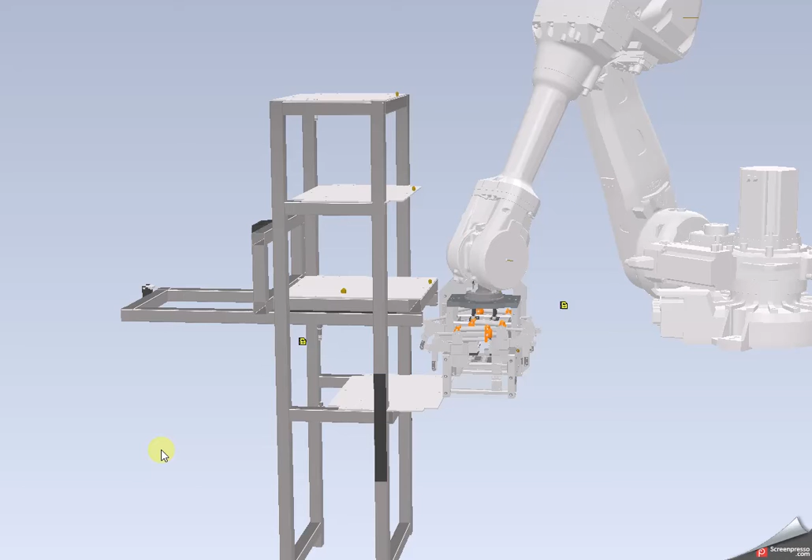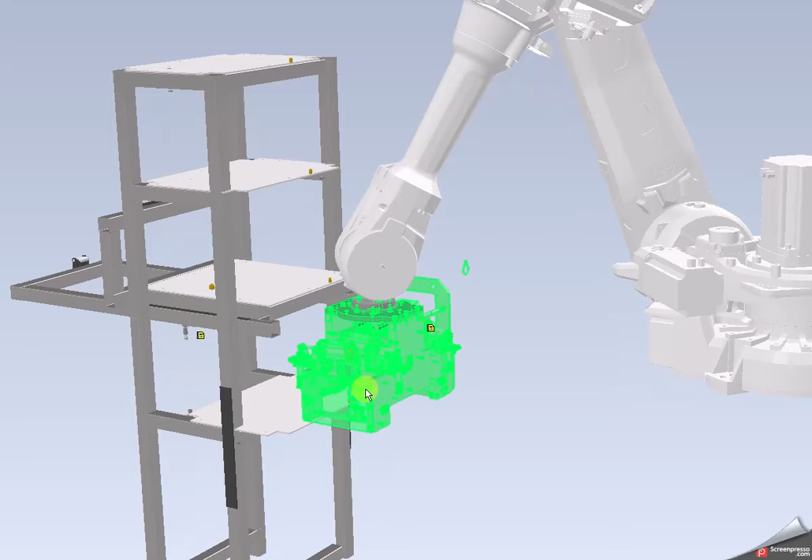Okay, so I want to demonstrate today how to link an Excel spreadsheet with a model, so that rather than doing the typical drag and move things around to try to look at things, I can actually give this a definite picking position. This is a robot, we've got a gripper on here, just for picking up a part. Can't show you the part because it's from the automotive industry. And this is a rack here, which...

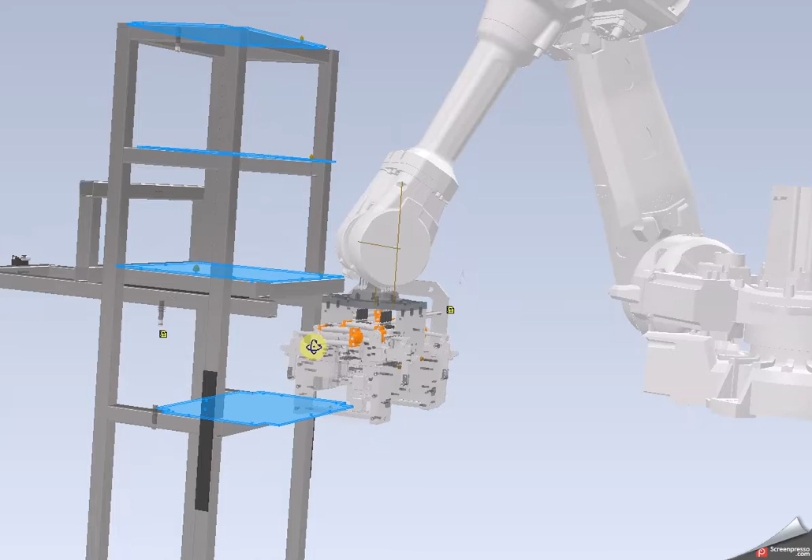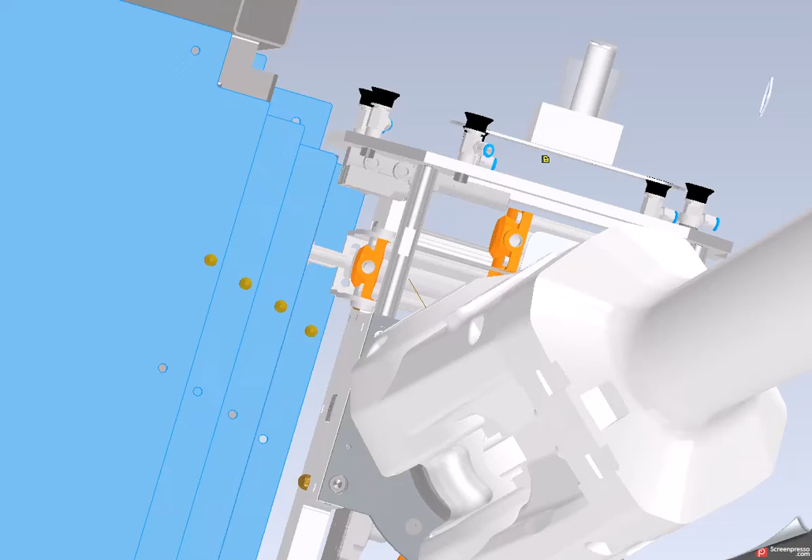This rack has 4 shelves which hold parts that are on dowels. A dowel pin, our part sits on there, but because our robot is getting close, you can see I've actually needed to stagger these shelves. The knuckle of our robot is going to collide with the part above, so we thought we'd step these back about 50mm. And to check we don't get collisions anywhere...

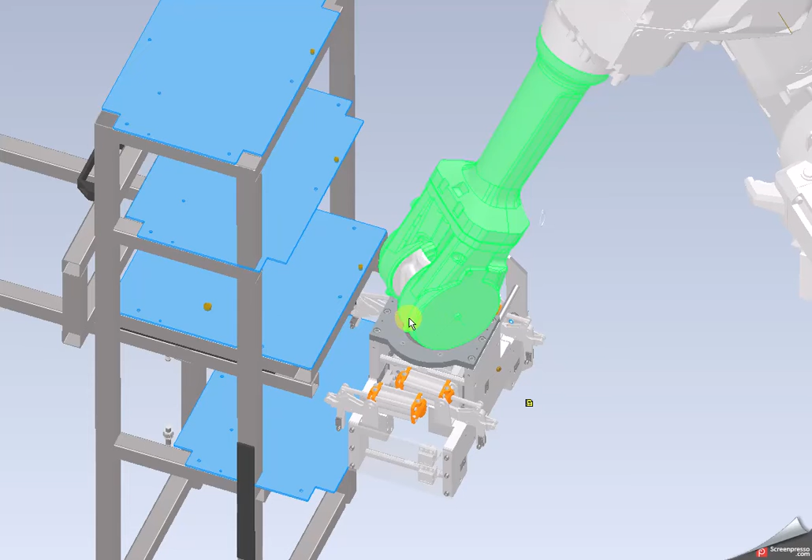I actually want to move the robot from position to position, nice and easy. I don't want to have to drag it each time. So I'll show you what we've done here in our robot assembly, under our...

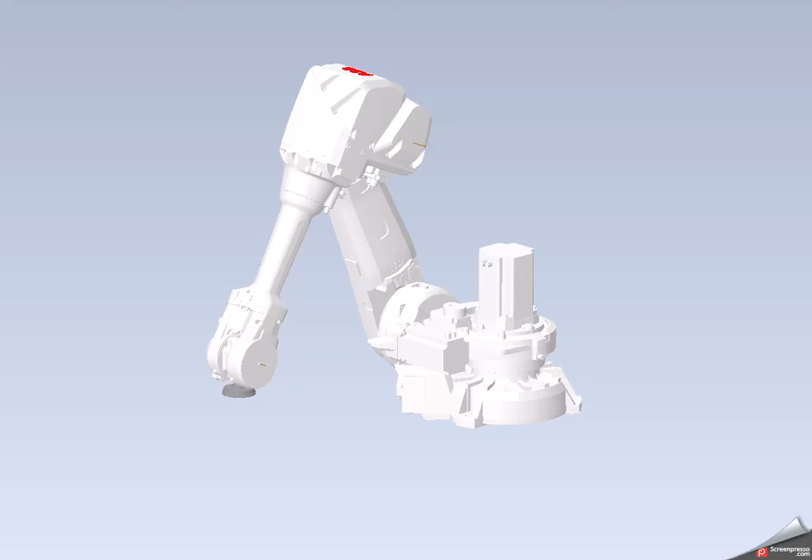I've given the height of our gripper to the floor. Here's our floor, we'll show you that. Okay, we've got the height of our gripper, and then in our main assembly, under our robot... oh no, I think I didn't put it in our robot. Everything's controlled inside here.

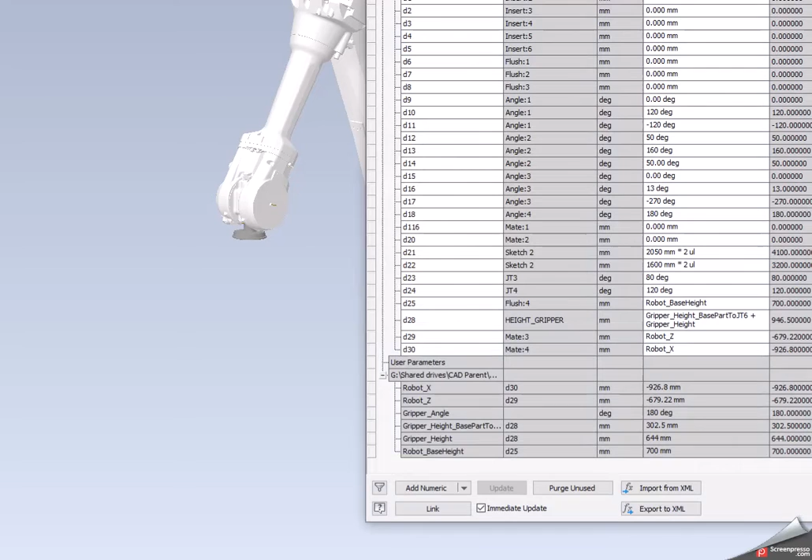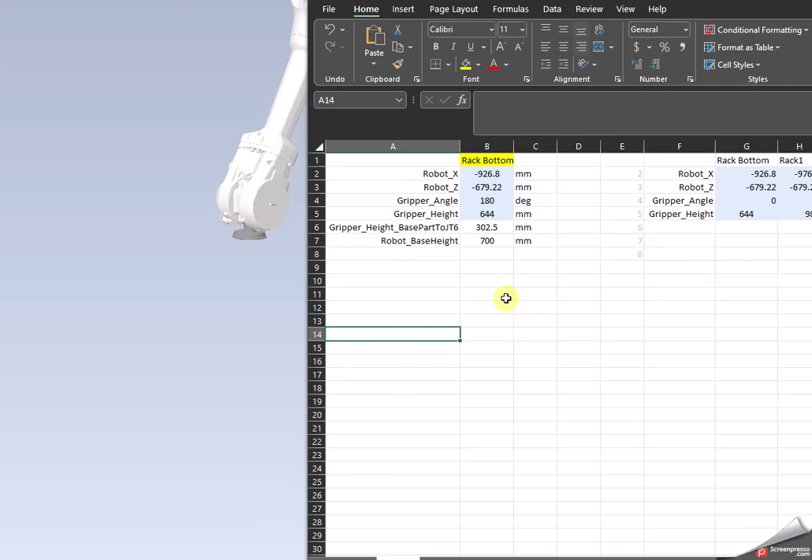So by saying link, choose a file, I've imported these variables from this Excel file. But something you'll notice on this Excel file, because we all love spreadsheets, is it refers to one set of coordinates, but then depending on which rack we're on, we've got different coordinates. Rather than copy paste this every time, I've just done a little horizontal lookup, which is like VLOOKUP, so I can say which position I'd like us to be, and get our robot to position there exactly.

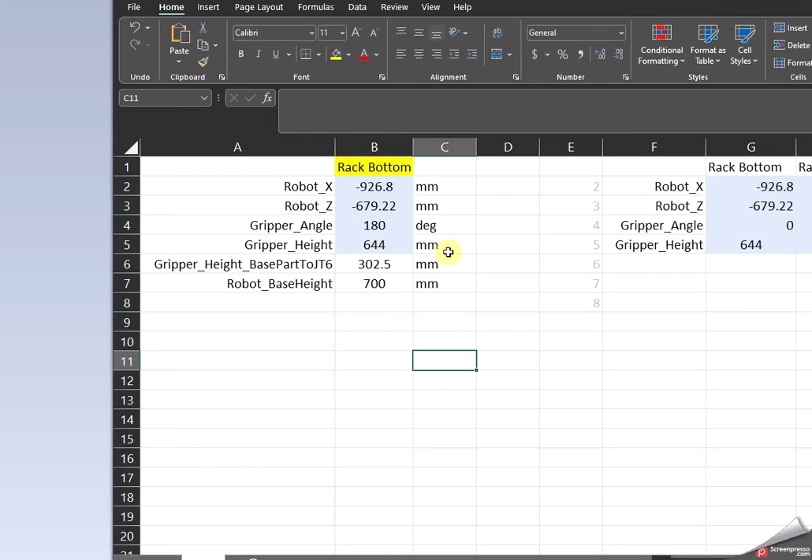So the important thing with these is sometimes it doesn't work with opening, but normally if you change something, you should then save, and then go into our assembly space and update.

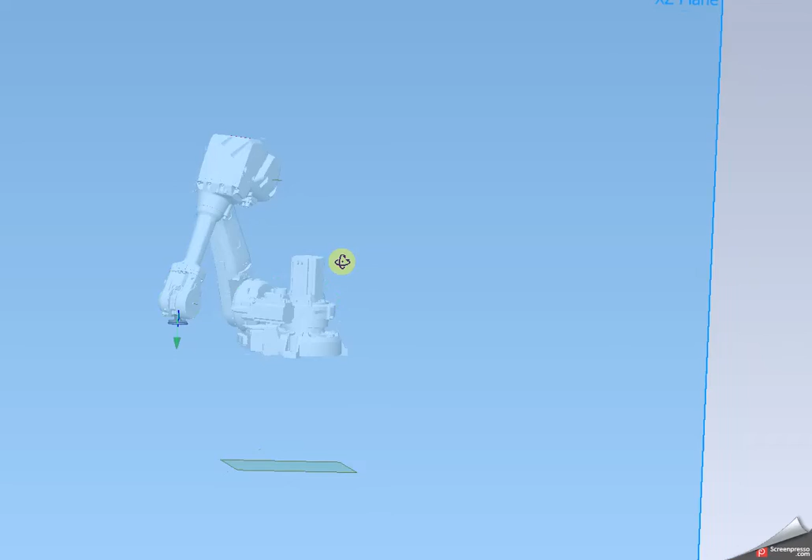Okay, I'm just going to show you how we set up these parameters. If we look at here, these are our 2 main planes, and I've set the center line of our gripper relative to this center plane, and the center line of the gripper relative to this plane.

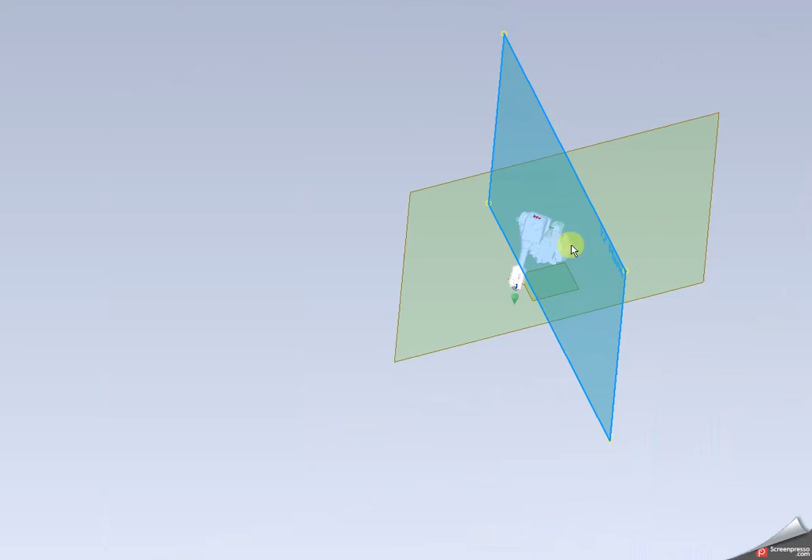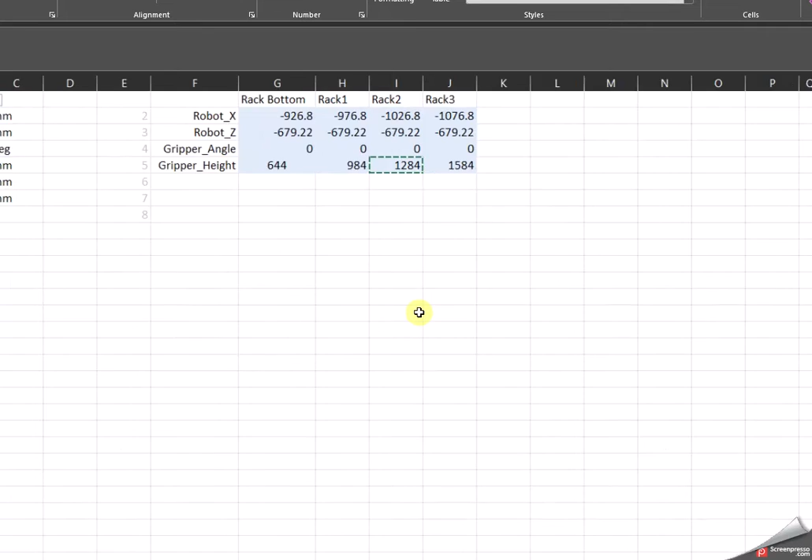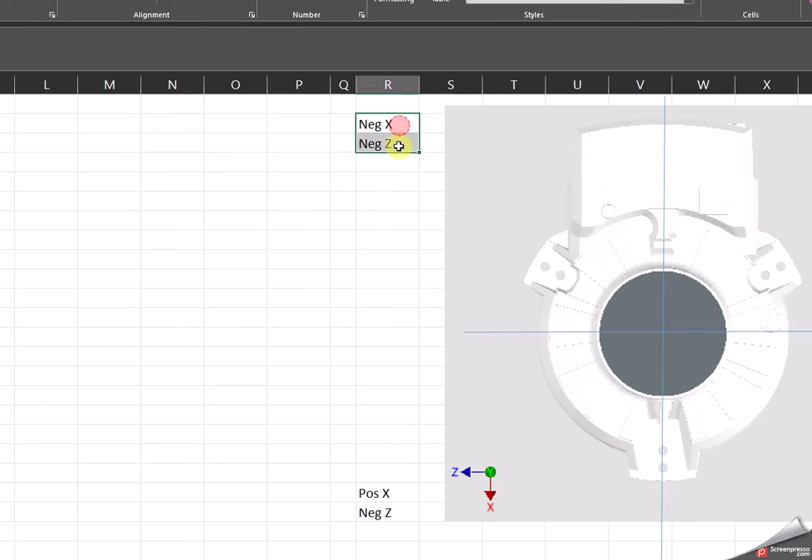And it comes about that we've got, if you imagine this like a graph on a sheet of paper, this is our negative zone - negative, negative, positive, positive, positive, negative over here. I'll show you, I think I've summarized that in this spreadsheet here. So this is showing the regions that we're operating in. So if we want our gripper to be over here, then both values are going to be negative there, and that's what we're getting here.

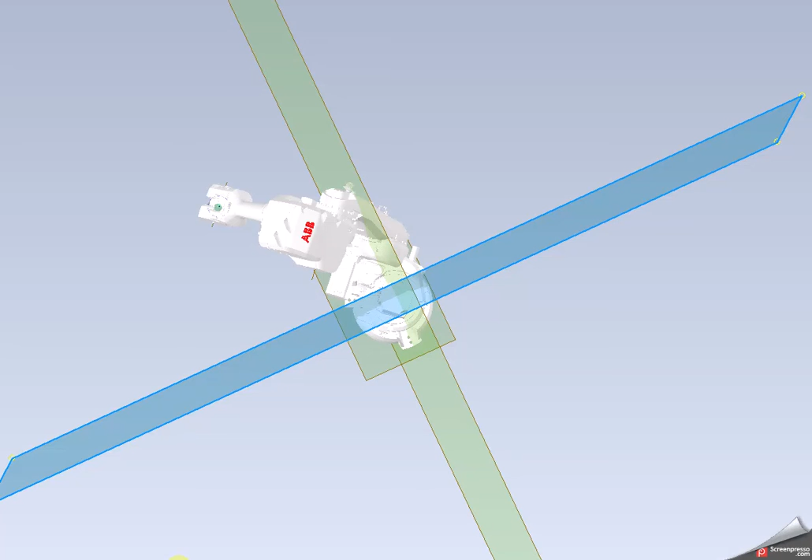I know there's a change in the height of the rack, so I can do this almost automatically. Between each rack, our height here is going up by 300 or 340 in each instance. The X on our rack, that's the robot X - I'm referring back to our main coordinate system down here. So our robot X is what changes, and our Y and our Z isn't going to change because we don't want the robot moving sideways.

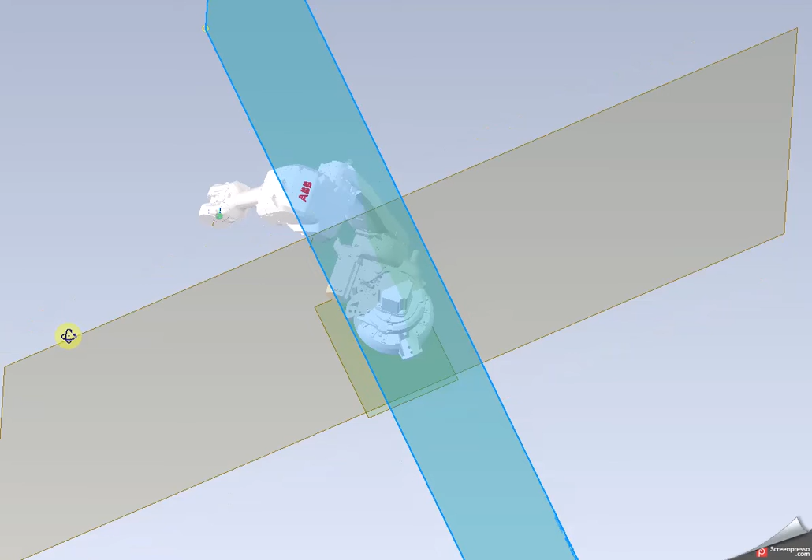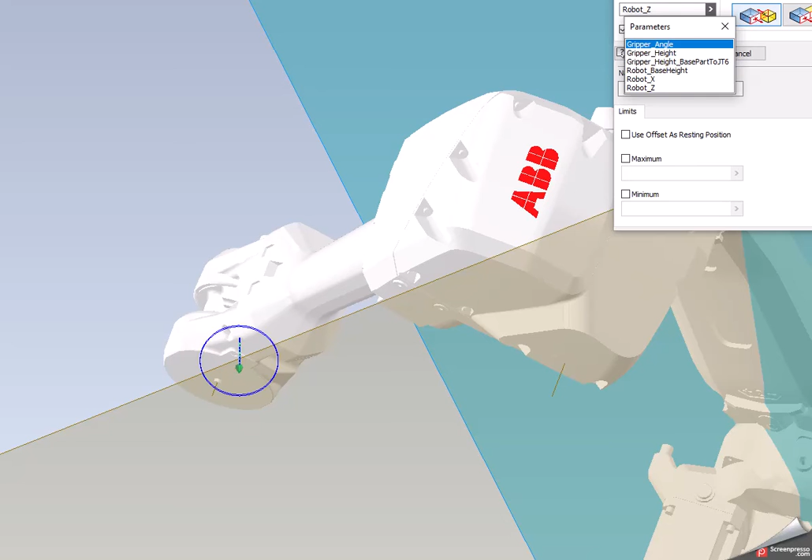Okay, before I go demonstrate, I'll just show you that in our robot under these here. So when you set up this constraint, it's just a normal mate constraint. We choose from our plane to our axis, and the offset, rather than putting a value, I refer to the robot Z, and we can do that by clicking this arrow, list the parameters, and this shows all the parameters that we've got in here, and they have come in from our spreadsheet.

So if we change our spreadsheet, this updates and our position will update. So let's try it. Okay, so we'll move around so we can see it a bit easier. And let's try...

Let's make rack 1 some more drastic numbers. Okay, let's say plus 500, plus 500. We'll change our angle as well, 90 degrees, and we'll change our height. Okay, so I've updated that there. You always need to have a blank column here.

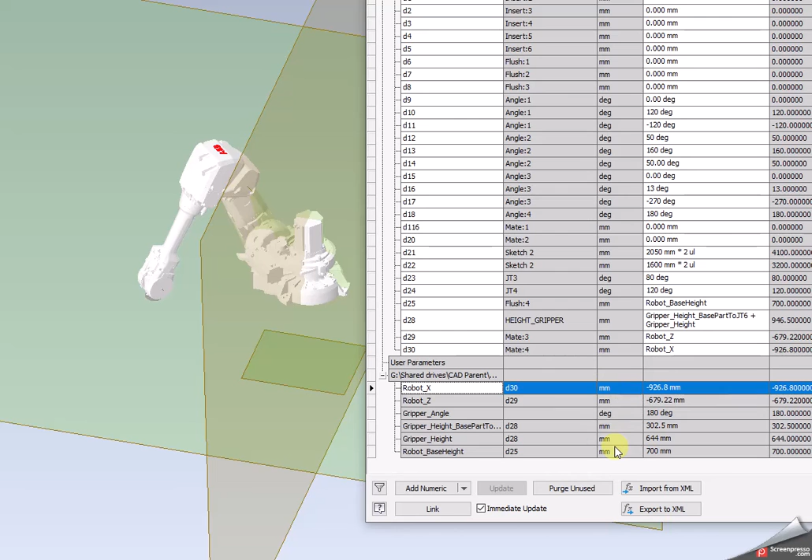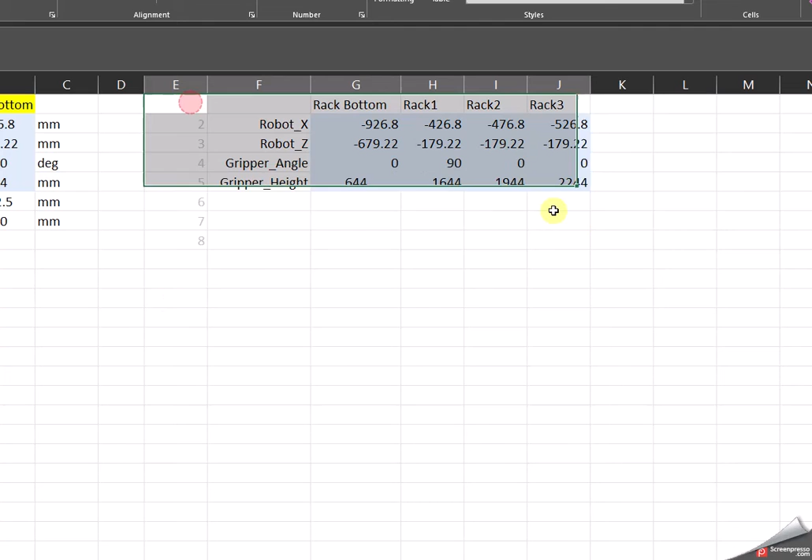So the way the syntax works or the lookup works from Inventor, when you import these variables, it wants to import every single column here. So in the spreadsheet, you can get away with using just 2 columns, and you don't define the unit. I find that using 2 columns and also defining the unit keeps things clean. But you always want to keep this column completely blank the whole way through the sheet, and then keep any working out that you're doing over there. So we can do something like that to help us remember that, or color it or something, whatever you want to do there. Okay, just don't put anything in there.

Alright, so these are our new values we put on rack 1. Let's go into rack 1, and our values updated in our sheet here. Okay, and I'm going to save that. And so now, so in our robot, we go update. I normally do a global update. And it didn't like it. Don't you hate it when that happens? So it could be outside the range of the robot there.

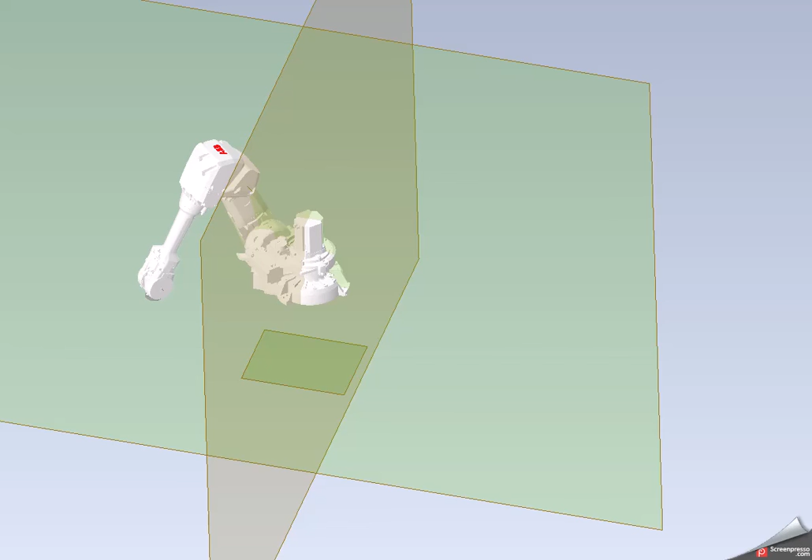So I'm just going to make it more realistic numbers, make these numbers change by a little bit - 340. Okay, save that again. Let's try it in the main assembly this time and update. And there we go, so that's moved up to that new position. Let's see that live, we'll go again.

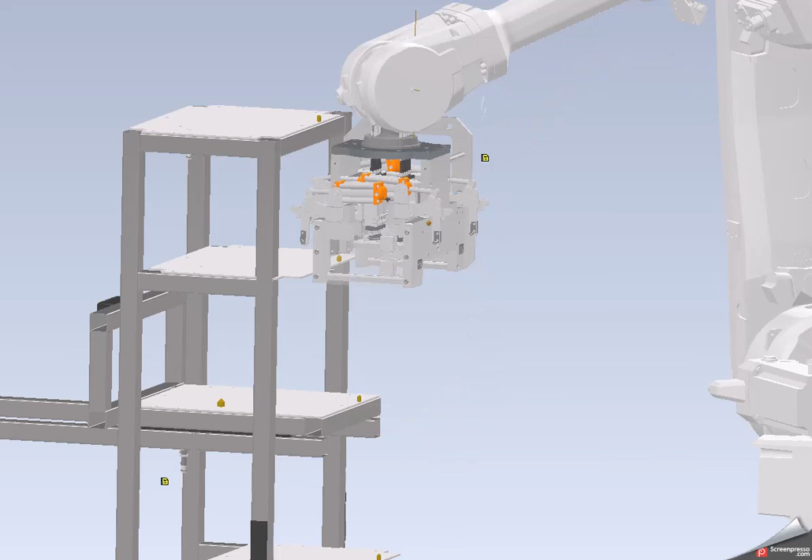Alright, let's make it rack 2 this time. And go up, save it. Back here, update. Okay, if you want to check it, we can measure from here...

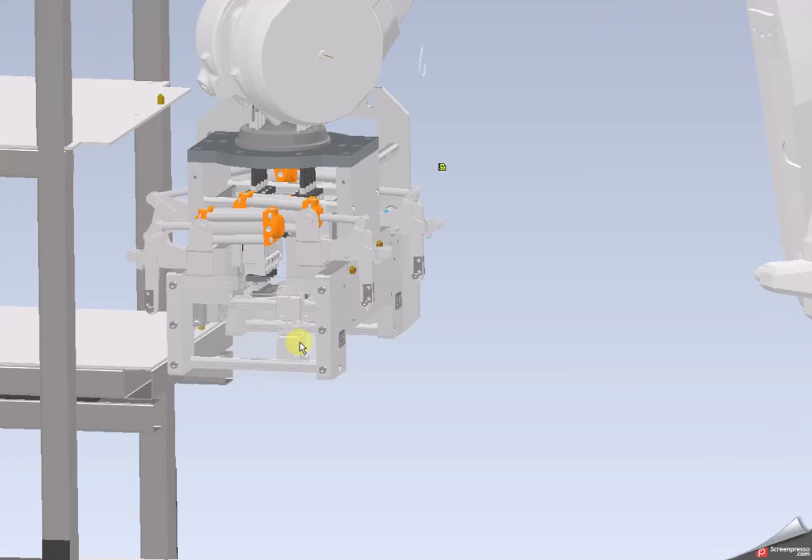Say 21.4. When we move down, you'll see it'll be 21.4 in the other one. So let's do it - 1. Save. Update. Let's measure that one. 21.4 off that one. Okay, so we know it's moving, and it looks like it's moving right.

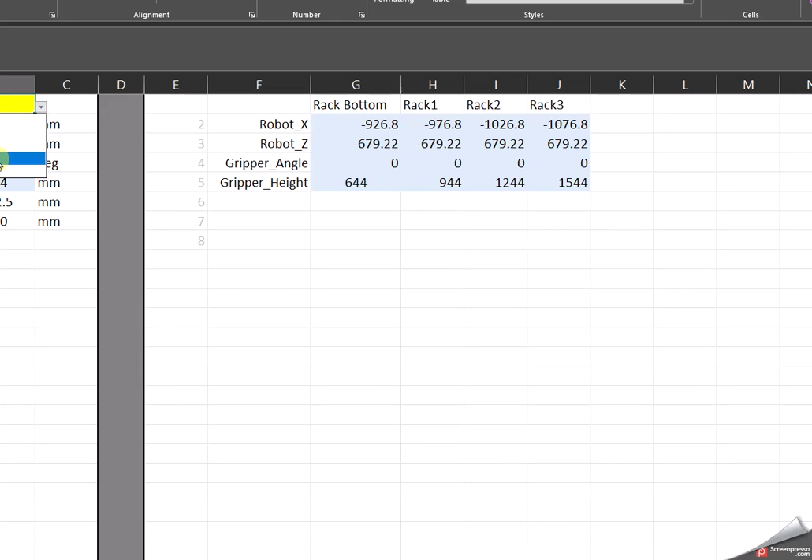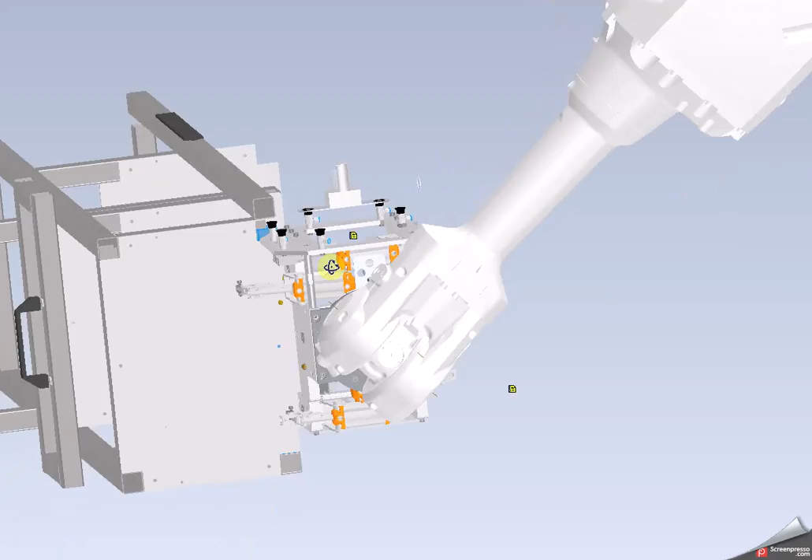Fine, so let's go up to the top rack, rack 3. Save that, back over to here, do an update, and there it is, picking from up the top. Okay, so now from that we can check our clashing and that sort of thing. I see, I haven't checked this yet - I see we're having some issues there. But this is a good way of being able to move the robot to whatever position that we want, check for collision and that kind of thing, and not spend a lot of time dragging things around.